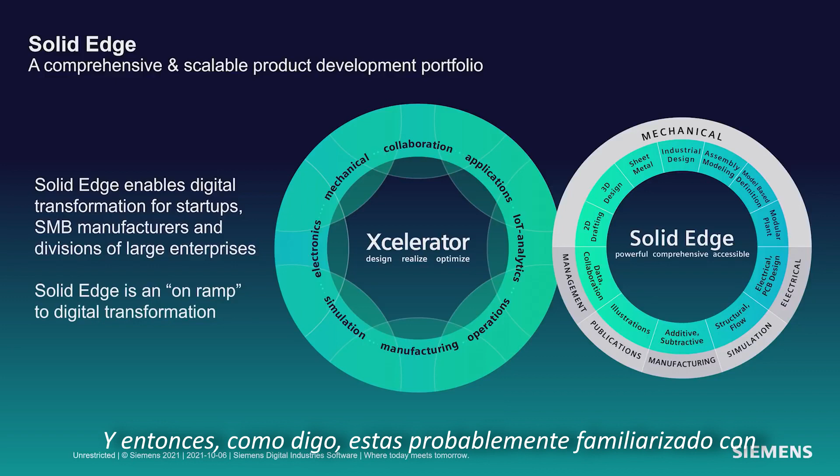And it all starts with Solid Edge. Solid Edge is your on-ramp, if you will, to digital transformation. You're probably familiar with lots of Solid Edge capabilities for sheet metal, 2D drafting, etc. But maybe you need to go beyond that with the whole Solid Edge portfolio and Xcelerator, whether that's managing that data, doing technical publications, simulation, electrical, it's all there for you.

And what we see is customers doing amazing things with Solid Edge and the Solid Edge portfolio. For example, eNovates. eNovates is a company in Belgium that makes mobile charging stations. And they're able to take Solid Edge and PADS Pro and use those two together to do great things. As you see, they don't find that level of integration in other engineering software.

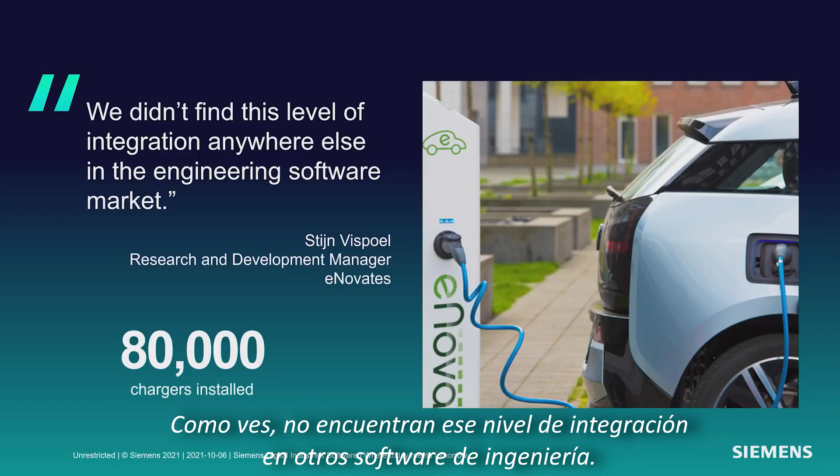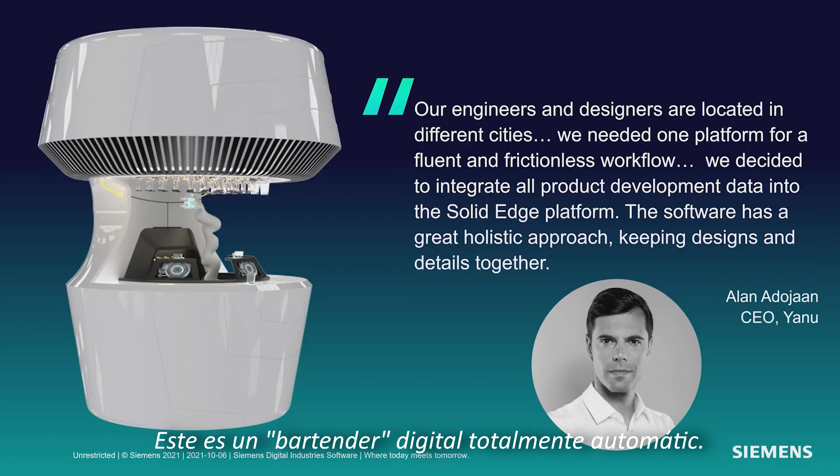Another great example is Yanu. They make the beautiful product you see on the left here. What product might that be? Probably something you've never seen before. This is a fully automatic digital bartender. So it can recognize you, make the proper drink, do the proper billing, all contactless, very important today. And I love what Alan has to say. The software has a great holistic design approach, and that's what we like to see and how we can bring you more productive software.

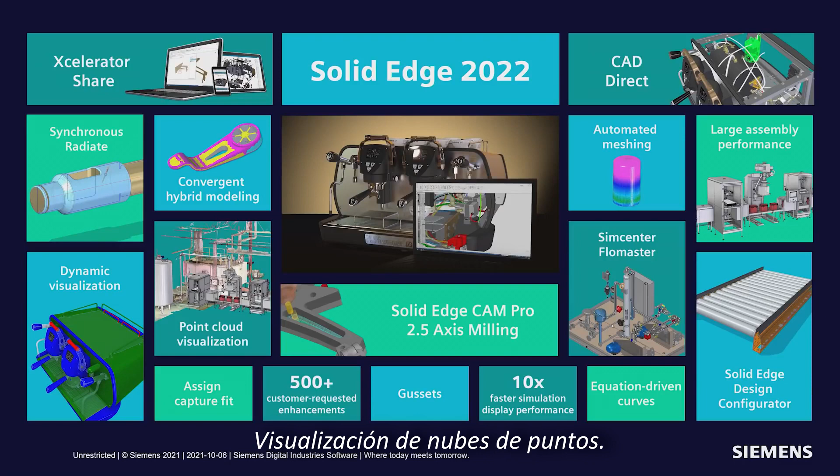So let's talk about Solid Edge 2022 itself. Solid Edge 2022. Engineered to grow your business. There's so much in it, we'll only be able to cover some of it today. Things like Xcelerator Share, allowing you to collaborate with customers and suppliers. Or CAD Direct, integrating CAD files from other systems and bringing them directly into Solid Edge seamlessly. Point cloud visualization, big scans of plants, being able to design your equipment in context of that big scan. Solid Edge Design Configurator, a whole new capability to configure your designs quickly and easily for your customers.

Now, as we go through our discussion today, we're going to be using two different data sets because there's just so much to see, such a broad range of functionality with Solid Edge. We'll be working with an espresso maker from Fiamma, a company based in Portugal. And we'll also work with a product from Bergner, a company based in Switzerland that makes chemical and pharmaceutical custom machinery.

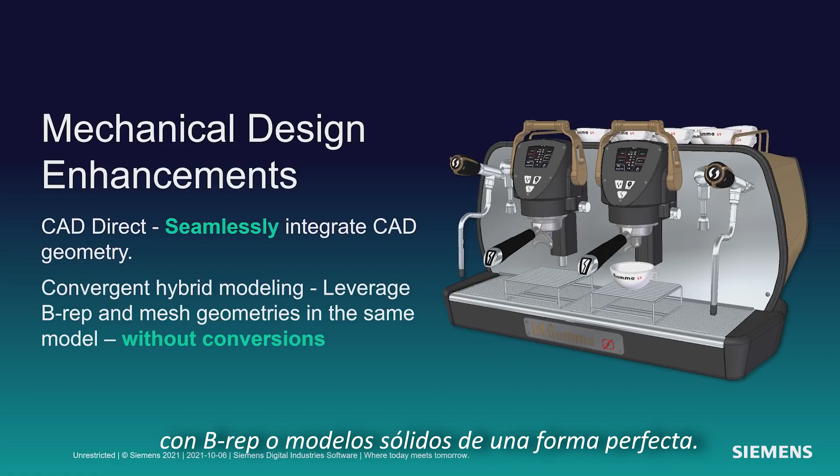So let's start by talking about mechanical design. And let's start with CAD Direct. CAD Direct lets you seamlessly integrate data from other systems into Solid Edge without translation and automatically take updates. We'll also talk about convergent modeling. We've been working on this technology for several years now. It's getting very sophisticated. The ability to integrate mesh models with B-rep or solid models in one seamless way. So let's look at that with Jeff now.

Thanks, Dan. First, we'll take a look at subdivision modeling. In this example, we will add support members to the base of the Fiamma espresso machine. The new subdivision bridge command can be used to easily connect edges or faces of subdivision cages and create a lofted structure between them. Here you see an example of that, where we'll select the faces of each subdivision model that we want to loft between.

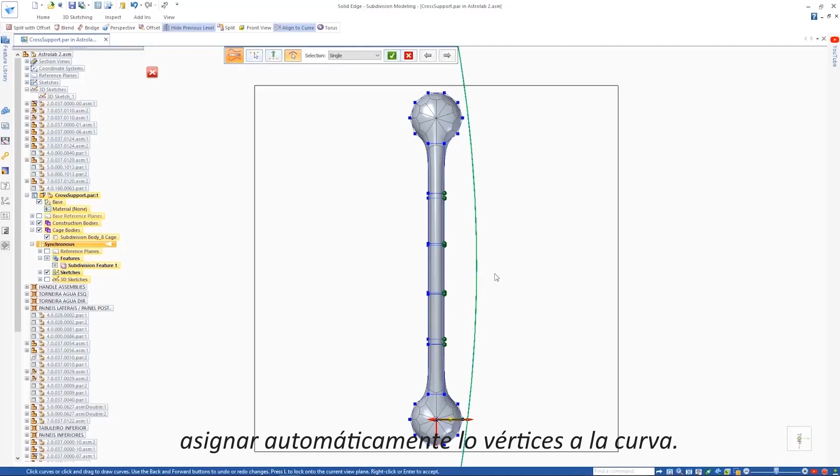Then we'll add the control curve to help us further define the overall shape. Next, we'll use the new Align to Curve command to further define the shape of the part, simply by selecting the cage vertices to define the direction and then picking the curve, which automatically maps those vertices to the curve. You can even sketch your own shapes and curves inside the context of the command, and gesturing is supported for inking your curves.

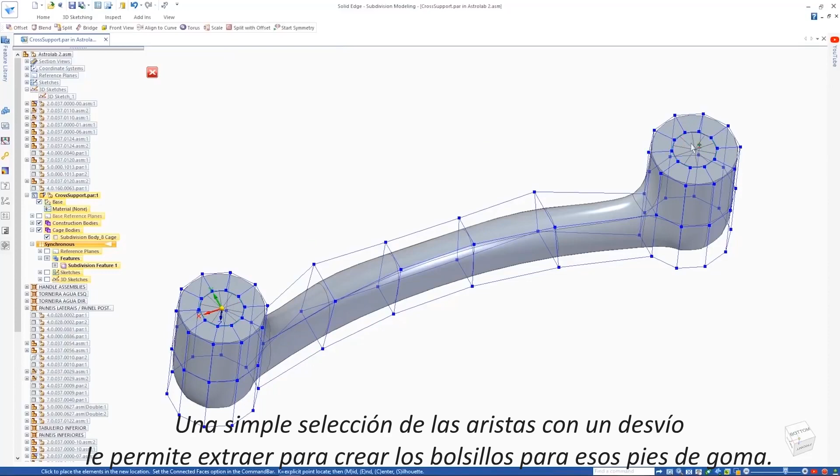Here we'll show another option called Split with Offset to add some pockets to support the rubber feet. A simple selection of the edges with an offset allows you to pull to create the pockets for those rubber feet. Next, we're going to replace the handle with a new design that's been 3D scanned.

This result is a mesh model that we import. We can visualize the mesh with the new Faceted Edge command. In this case, we'll clean up this model a little with the Remesh command.

Now faces have automatically been identified and the sketches are added to the planar faces of the mesh. We add a series of cutouts in order to reduce the weight and improve the appearance of the part. Notice the resulting geometry isn't faceted.

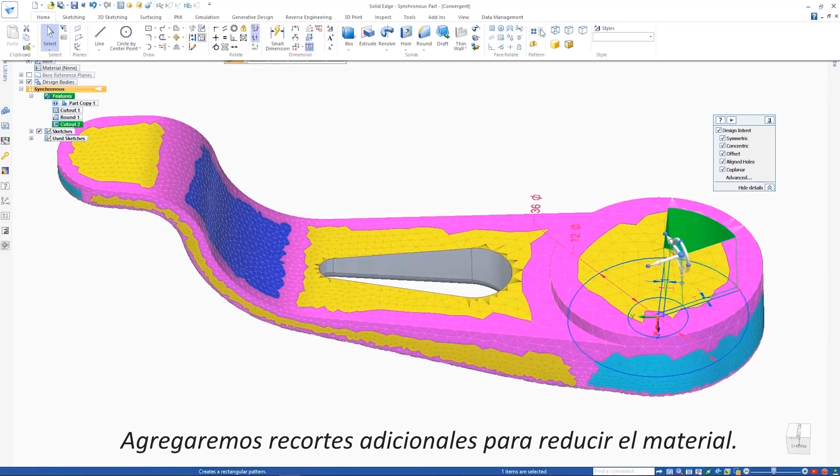Solid Edge now seamlessly combines mesh and B-rep geometry in the same body or part. We'll add additional cutouts to reduce the material. Once the cutout is complete, it can be patterned.

Finally, we're back in the assembly where we'll replace the current handle with the new meshed handle. But you'll notice the mounting holes are missing from the component. This can easily be solved by doing a Boolean operation using the mesh model as the target and the components from the assembly as the cutting geometry. These new capabilities further enhance your ability to use mesh models in your design process.

Now we'll use the new component finder in the Solid Edge Pathfinder and we'll search for the desired filter holder handle, which is designed as a family of assemblies. One of the versions is designed for a double espresso shot, the other is a single espresso shot.

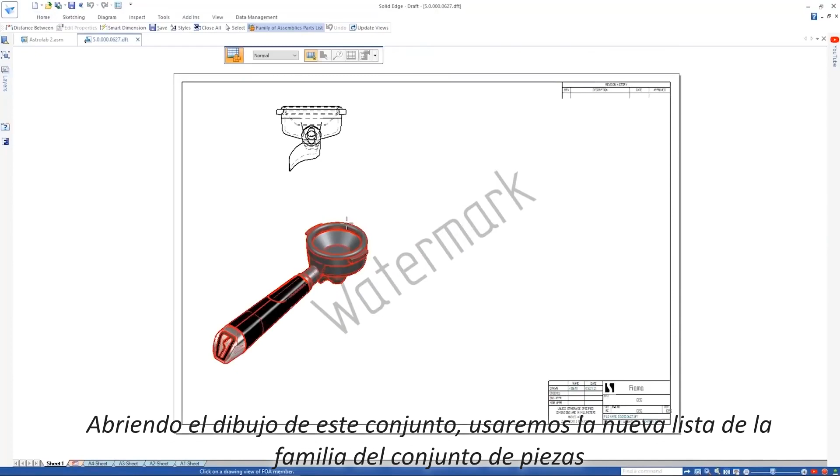Opening the drawing of this assembly, we'll use the new family of assemblies parts list to place a table and detail the parts used for each member.

Now we'll look at some enhancements to dimensioning in Draft. Dimensioning to virtual intersections or arcs of rounded edges is now supported. We can also choose to display projection lines to those intersection points.

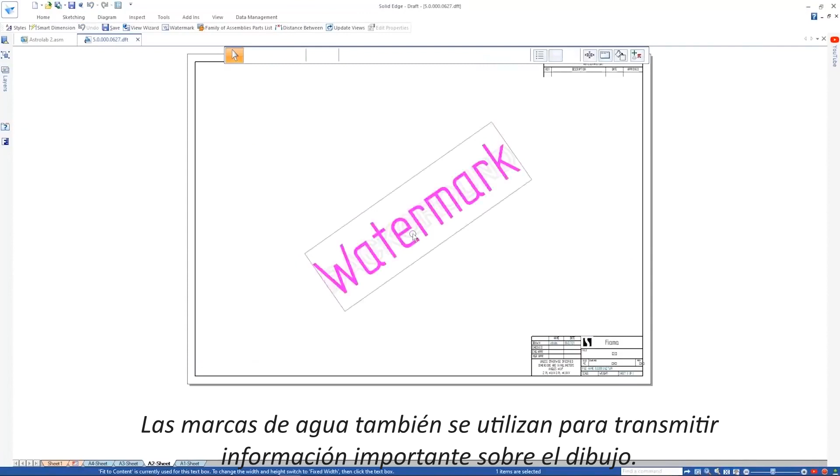Watermarks are also used to convey important information on the drawing. We'll change the existing one so that it retrieves the document status for the drawing property text.

The new CAD Direct command enables us to use foreign CAD data, geometry, and assemblies in Solid Edge directly without requiring any translation. The water boilers that you're looking at here were designed in NX.

Once inserted into Solid Edge, they can be positioned just like any other assembly. Since we need two of these, we'll simply copy one to create the second. Notice the boilers aren't quite in the right location. We'll go back into NX and make the changes needed to the mounting bracket so they'll be in the right position. Since Solid Edge has associative links with NX, a simple update brings the changes in.

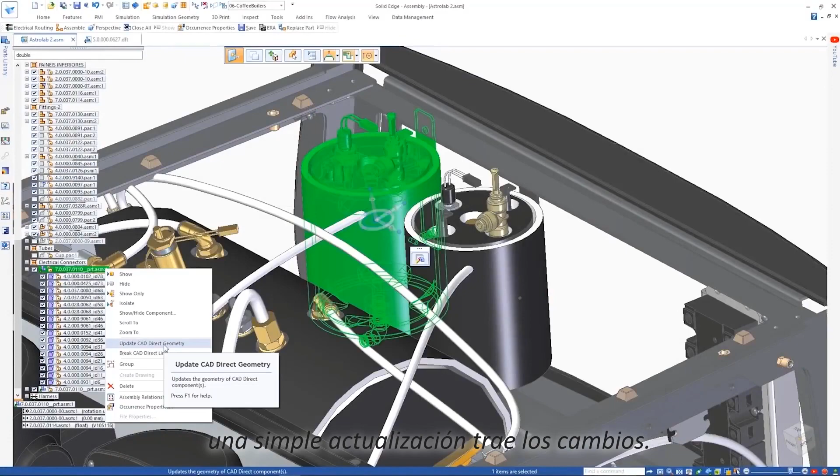Next, we'll look at electrical routing enhancements. Solid Edge now supports the display of bicolored wires, allowing us to change the display of this ground wire to be striped green and yellow. Various pattern types are supported as well, including single stripes, helical stripes, zebra stripes, and dashes.

And finally, KeyShot, the best-in-class rendering solution, also sees some impressive updates. Decals defined in Solid Edge may be automatically transferred, saving time and effort, which can be seen here on the logos and the cups in the digital scene.

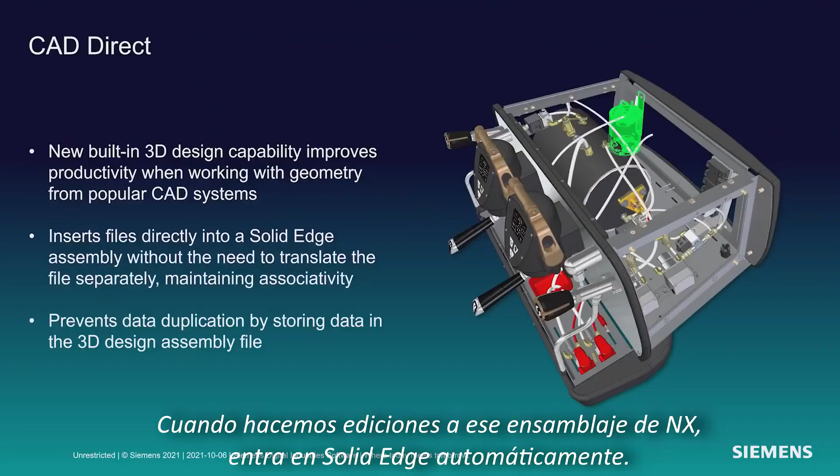Lots of amazing stuff in there, but I'm only going to highlight a couple things here that I think are real game changers. CAD Direct: you have the capability to get an NX assembly into Solid Edge directly, no translation. And when you make edits to that NX assembly, it comes into Solid Edge automatically. There's no extra files to manage. You don't have to worry about that. It's all CAD Direct.

And what about convergent hybrid modeling? You saw taking triangle meshes and B-rep solid models, pulling that all together into a single cohesive model, significantly reducing your design time.

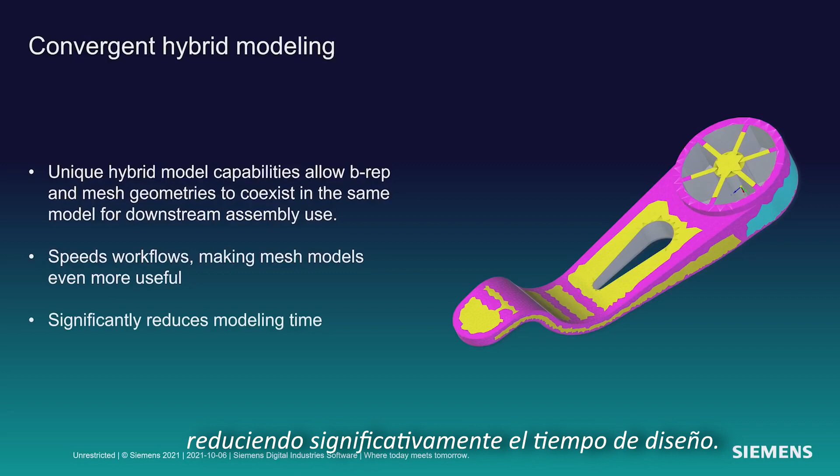Let's talk about some other mechanical design enhancements, some other great things in here.

Point clouds. It's becoming fairly common to be able to scan an entire plant or factory and bring that data forward. We can now bring that data into Solid Edge so that you can design in the context of that factory or plant. What about large assembly modeling?

We see people first building parts, then assemblies, then whole factory lines. Assembly modeling in Solid Edge keeps getting faster and faster, best in the business. And Synchronous Radiate, an amazing new command within the synchronous modeling environment that allows you to deal with radially symmetric parts and edit those effortlessly. So let's take a look at that now, Jeff.

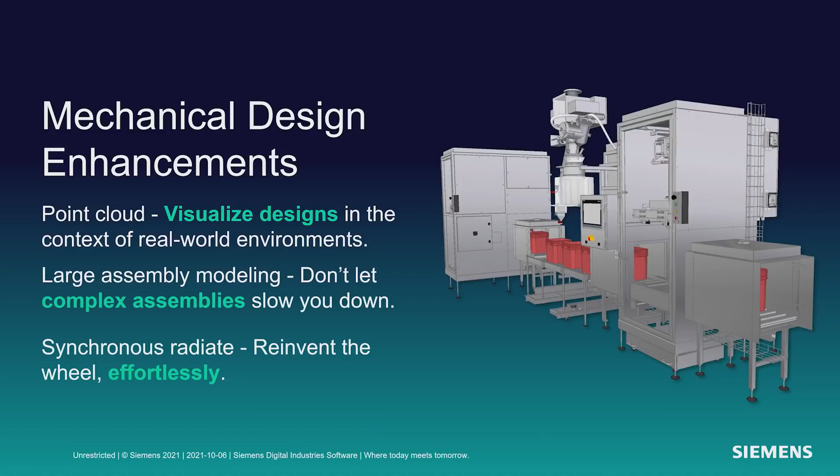Thanks, Dan. Well, the first thing we'll do is take a look at a new assembly preview mode. This mode allows you to very quickly open Solid Edge components and very large Solid Edge assemblies lightning fast. In preview mode, you can manipulate the view, show and hide components, and apply display configurations.

In this case, we'll isolate the most critical part of the model that we want to edit using a configuration. Then we'll simply tell the system how we want to open, and open only the components that are to be edited, saving you time and memory.

Another time-saving enhancement is the gusset command. We now allow you to automatically add gussets to a frame structure. Here you can see the user interface. You can define these gussets in any shape and size that you desire. Then you simply select the frame element, position where the gusset is to go, and the system automatically creates the component there.

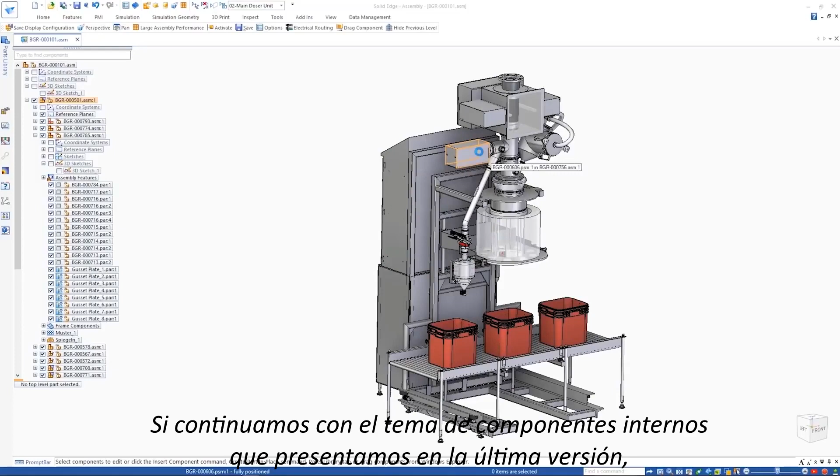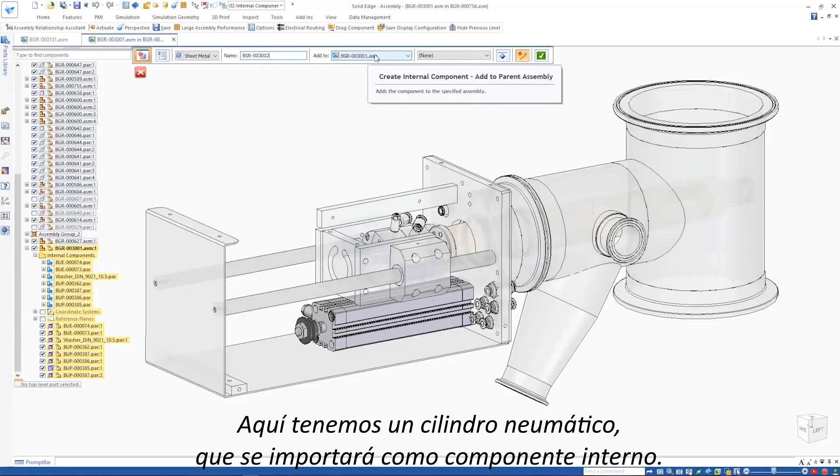If we continue down the internal components theme introduced in the last release, we now allow you to create an internal component and actually create the model geometry directly inside the Solid Edge assembly. We've introduced this new assembly modeling capability that gives you the ability to create the entirety of a design without any need for an external file. Here we have a pneumatic cylinder which will be imported as an internal component. We need to add a bracket to this assembly, but since it's a purchased part, we'll just create this as an internal component, again saving the need for external tracking of files.

If you'll notice during sketching, a pop-up menu allows you to quickly access commands that are relevant to your selection. This is new for Solid Edge 2022.

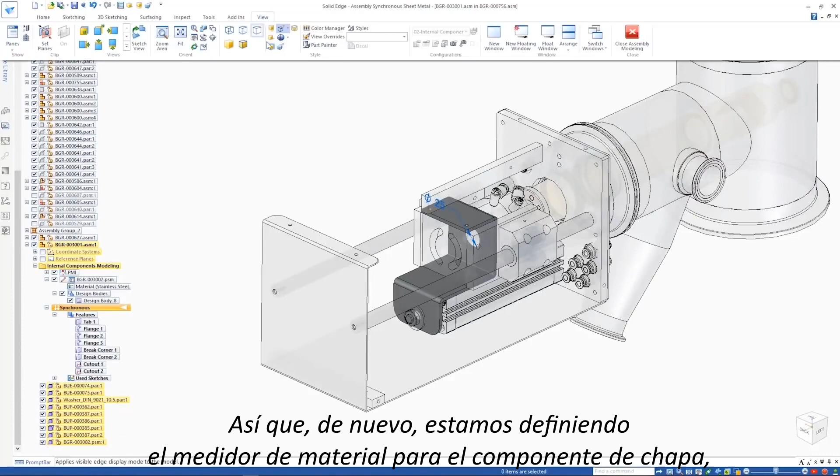So we've defined our sheet metal part. We'll also have to give it a material definition and a gauge definition. In addition, we're able to create geometry and reference the components from the assembly, whether they're internal components or real components in the assembly. Again, we're defining the material gauge for the sheet metal component, and we've defined this component completely inside the context of this assembly.

You're also able to drag the component, doing animations using both internal components as well as the real component combined.

The new component finder speeds up the process for locating parts within the assembly. You simply key in the name and it finds the list quickly. Here we found a shaft, and we used the new Radiate command to edit the radius or the diameter of the shaft component.

You simply select the shaft, putting the components in the select set that you wish to change, and then Synchronous does the rest. In this particular example, we want to include the pocket in the radiate and the offset option. Simply selecting that pocket and including it allows that to be done.

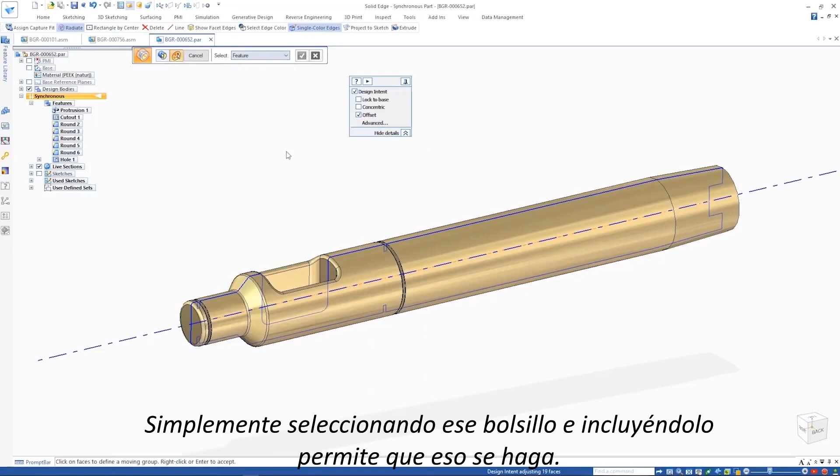A new Assign Capture Fit command allows relationships to be predefined on a component while in the context of the part. Here you can see that Capture Fit relationships already exist. We'll add a new Capture Fit to the collection and save it to the component. When I place the handle into the assembly, all you have to do is select the component and select the mating components you want to mate it to, and the handle automatically snaps into place. It's as easy as that.

Here's another example where we have a handle that needs to snap to 5 new locations. Again, the Assign Capture Fit makes it easy.

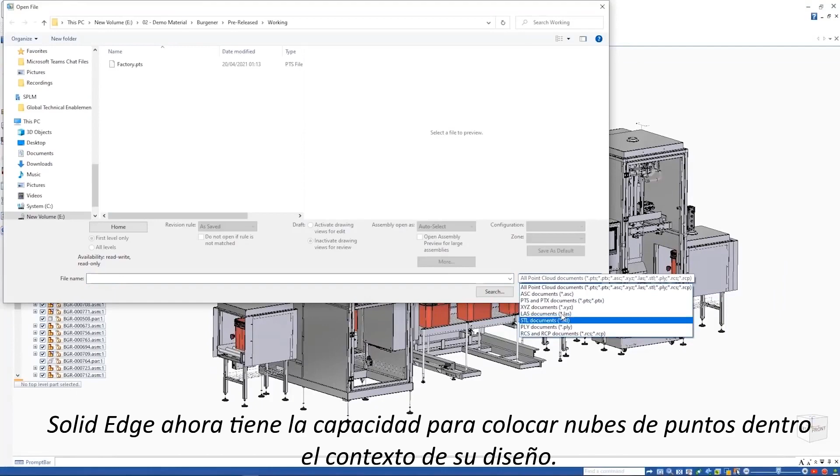Solid Edge now has the ability to place point clouds within the context of your design. This allows you to reference and visually indicate where your components will be placed inside a large assembly. Solid Edge supports multiple point cloud types and then allows you to position your component inside the context of the plant design.

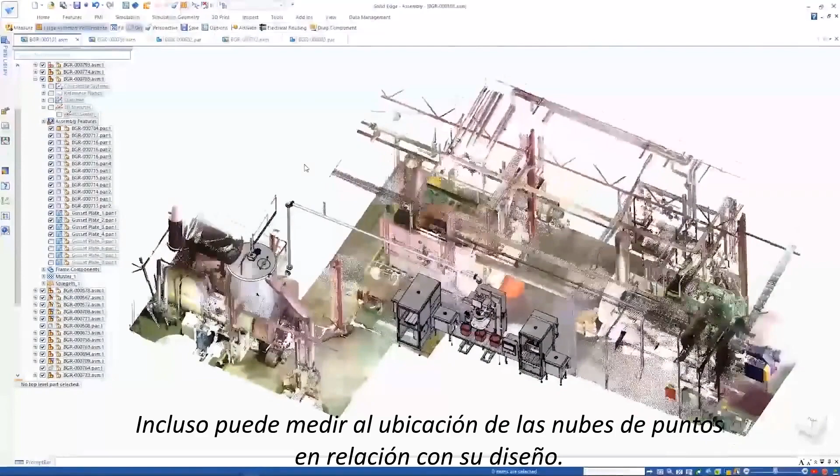The point cloud can be easily repositioned. Clipping planes can be used. You can even measure to the location of the point clouds relative to your design. Here you see that the tank component was in the wrong position, and it was moved to match the point cloud and the plant definition more precisely. And that's it, Dan. Back over to you.

All right, thanks Jeff. So many great things to see in there. But something I really want to highlight to you is a game changer: point cloud visualization. The ability to take scans in, gigantic scans, millions or billions of points, and be able to look at those in the context of Solid Edge and integrate your design directly in there, designing in context of that point cloud.

As you can see, they're full color, they give the full feel of the plant or factory. Really amazing stuff.

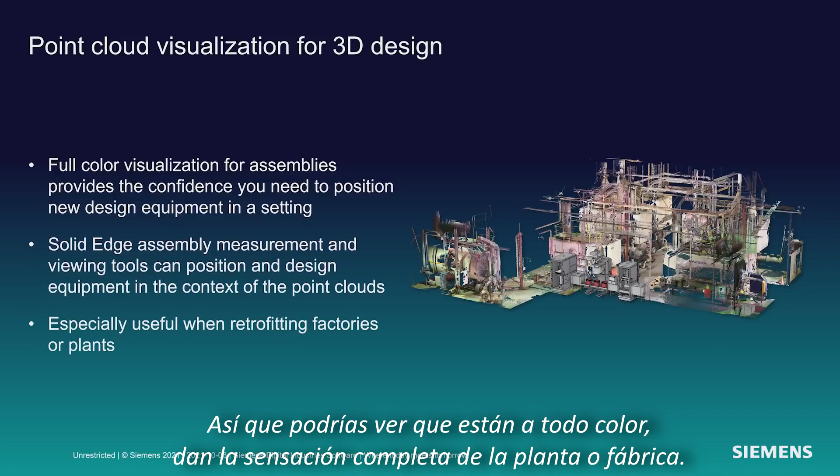And we see that our customers really love this new technology. So Benjamin at Bergner, for example, eliminated a lot of tedious manual effort. It's just so much easier with the new point cloud technology.

And what about large assembly modeling itself? Order of magnitude increase in large assembly modeling performance. So you have that preview mode where you can very quickly bring up the assembly, very massive assemblies, decide what you want to work on, and then just bring in that bit of the assembly, really improving your productivity.

And we see that folks are already taking advantage of this. Our beta customers have been using this, like Luca Carminati at CMS. Much, much faster work, saving a lot of work on their designs.

And what about synchronous radiate? Really amazing stuff if you're working on those axisymmetric parts. Being able to make edits without having to do any extra effort happens almost magically. Great stuff.

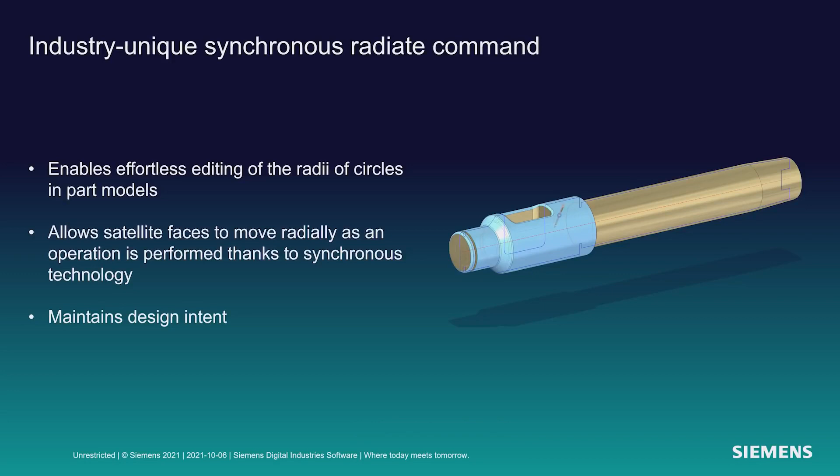Okay, next up is Solid Edge Design Configurator. I'm very excited about this. If you're doing any engineer, configure-to-order type of products, the ability to very quickly change your designs and have new quotes very quickly. Let's take a look at it with Jeff.

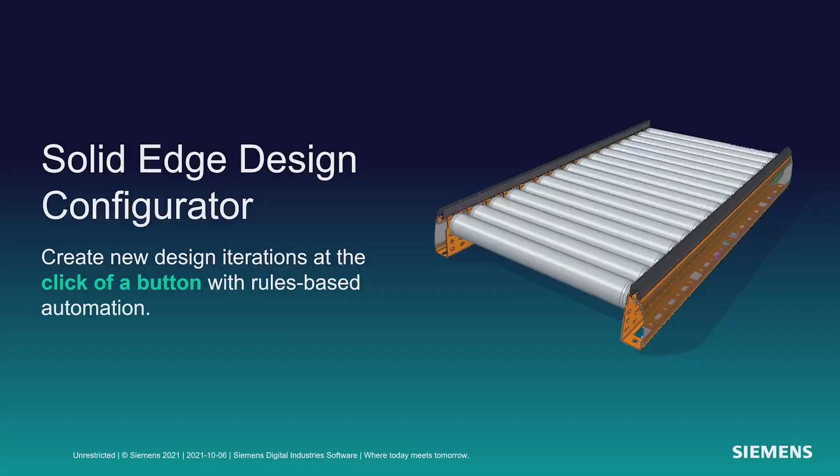Thanks, Dan. The new Solid Edge Design Configurator allows you to design multiple product variants directly in the context of Solid Edge. In this example, we'll configure a variety of conveyor designs.

The first step is to select the component to be configured. The next step is to define the master input parameters of the configuration. In this case, it's the length and width of the conveyor plus the pitch of the rollers. Values can be easily edited for any parameter, and images can be included in order to help the end user identify the needed inputs when configuring the model.

Defining a new input parameter for the pitch of the conveyor, we will quickly configure the name, type, label, and render style to use radio buttons. The pitch value of the conveyor can be customized between 60 and 90.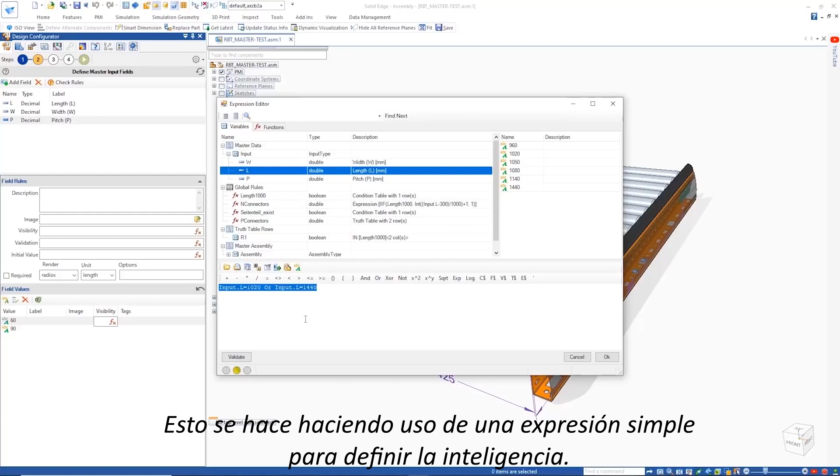However, since different lengths of the conveyor require different pitches, visibility rules need to be applied. This is done by making use of a simple expression to define the intelligence. Here, the rules are being validated to ensure consistency and proper definition have been made. The function is then copied and pasted to allow you to easily reuse formulas without having to include them again. Skipping to the last step of the configuration, we can see the configuration form is properly created.

Next, defining the rules for the process. Here we have multiple rules to drive and configure the connectors at the bottom of the conveyor. We will use a combination of simple condition and expression rules and a truth table to work out the number of positions of the connector. All rules can be quickly validated.

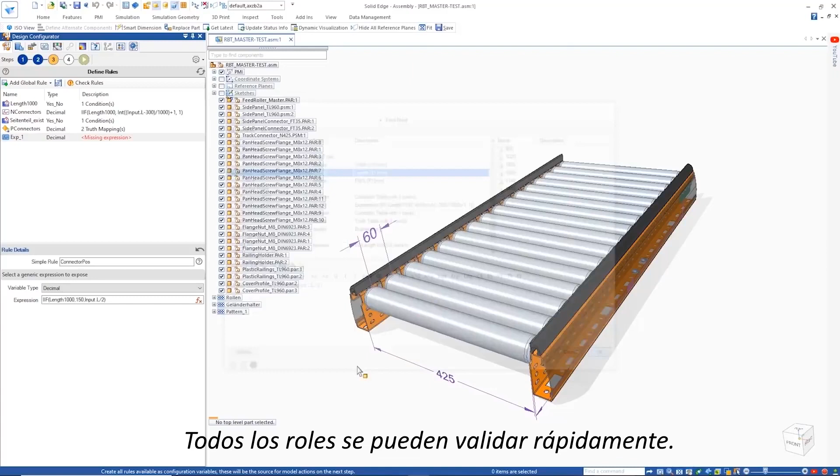Finally, we specify the actions to be taken. Here, variables are set and components are replaced to satisfy the input parameters. A rename model action will ensure our final assembly will be renamed appropriately and also create the other necessary outputs, for example a step file as shown here. Now we can run it quickly and create as many configurations as needed.

A newly generated configuration can easily be shared with Pack and Go. The configuration logic is all stored within the CAD model. There's no need for any further plugins or external resources.

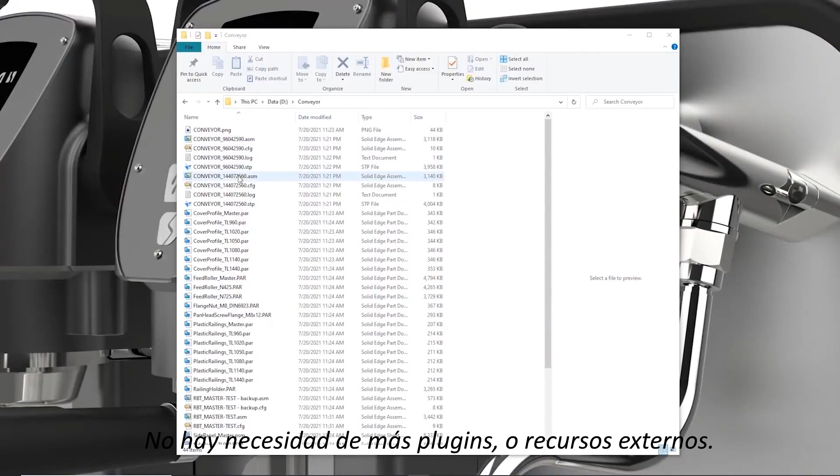And with that, Dan, I'll hand it back to you. All right, thanks, Jeff.

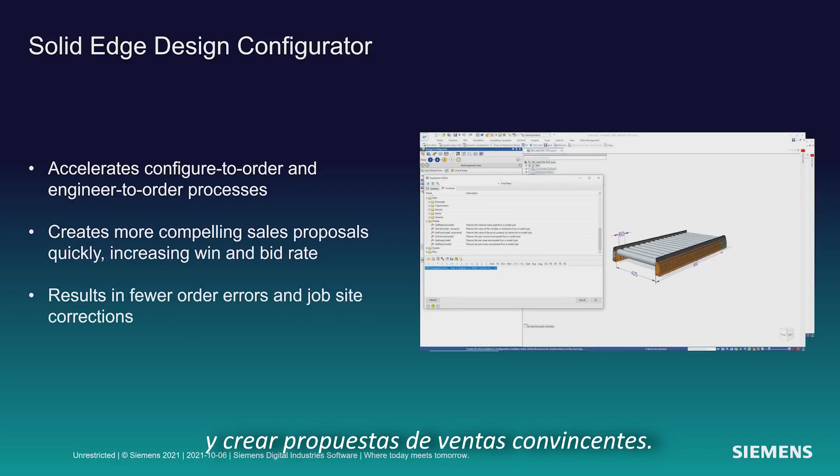So as you see, with the Solid Edge Design Configurator, you can accelerate your configure to order and engineer to order processes and create compelling sales proposals. You're also going to see that it really error checks for you and it creates a nice dialogue for your users to interact with so you can very quickly configure new products.

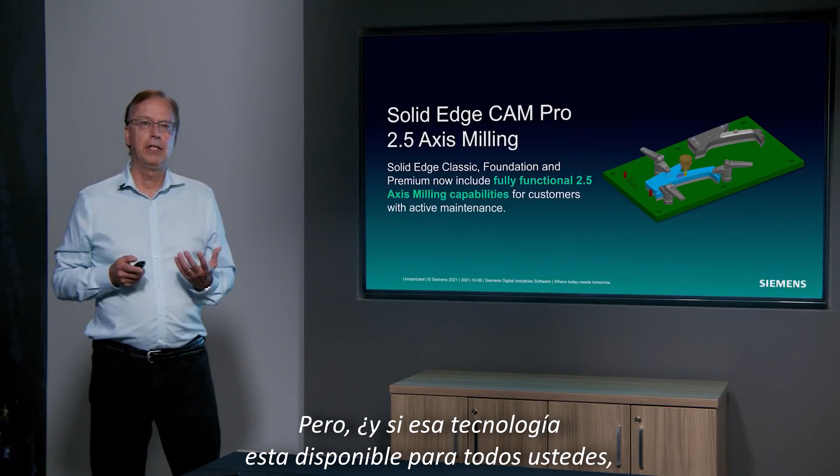What about CAM? Solid Edge CAM Pro. Tried and true technology developed over the last 40 years. A lot of users using it today and enjoy the benefits of it. But what if that technology was available to all of you, all Solid Edge customers on maintenance? That's what we want to introduce to you today with Solid Edge 2022. Jeff. Thanks, Dan.

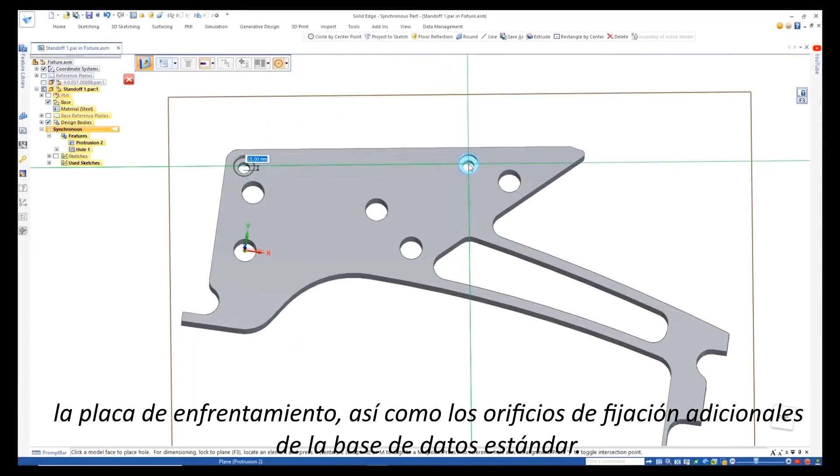Here we'll be using Solid Edge CAM Pro to create the manufacturing toolpaths for the rear legs of the Fiamma espresso machine. First, we'll use the Solid Edge assembly tools to create the shape to represent the stock parts, and also the parts that form the fixture assembly, which includes the standoff plate as well as additional fixing holes from the standard database. We will also make use of supplier catalog in 3DFindIT to get the appropriate socket head cap screws to be used to fix the component in the fixture.

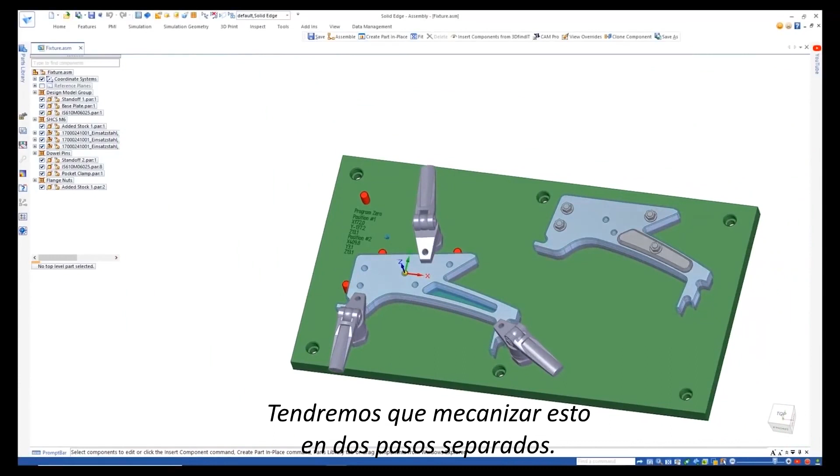So as you can see, Solid Edge is a great CAD for CAM tool. We'll need to machine this in two separate steps. Step 1 is to mill the pocket and drill the holes, and step 2 is to machine the profile. One click will send the entire assembly to the Solid Edge CAM Pro application. Note that associativity is maintained to the complete assembly, so if there are any last-minute changes, we can quickly update them and continue the NC programming process.

New for Solid Edge CAM Pro is the ability to create adaptive roughing toolpaths for 2.5-axis operations. This is included at no additional cost. These are faster than traditional toolpaths and extend the cutting life of your tools. Notice the advanced graphic capabilities for validating your toolpath.

Here we'll create spot drilling operations for the 5 holes in the support. Notice the graphical pop-up hints that help us with operation selection. Graphical helps are also available for geometric selection. Each time we select a hole, we get a preview of the machining that will take place. Again, at any point in the process, we can get visual feedback on our decisions.

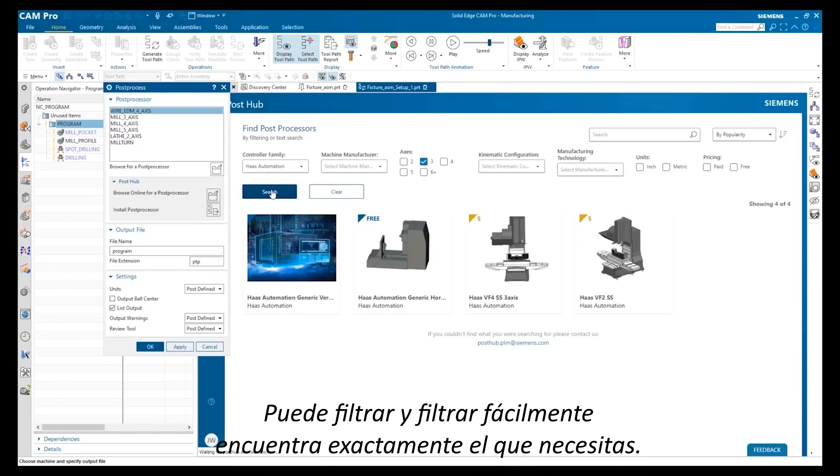Now that our CNC program is complete, let's run through the whole visualization process. Notice you get to completely visualize the entire machining process before committing it to machining. Of course, no job is finished until it has been post-processed for a specific machine. That's where PostHub comes in. It's an online database of over 1,200 post-processors. You can easily filter and find exactly the one you need. Also, PostHub is constantly updated, bringing you the most recent tools.

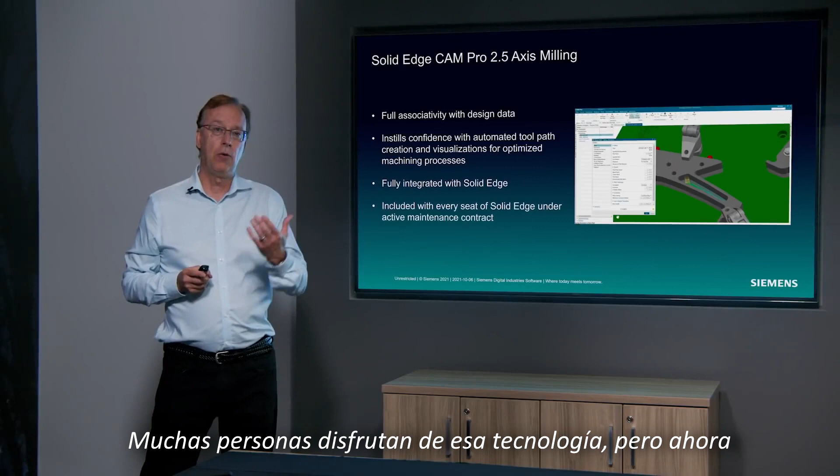And Dan, with that, I'll turn it back over to you. All right, thanks, Jeff. I'm really excited about this. There's a great heritage in Solid Edge CAM Pro and our machining technology over the last 40 years. Many people enjoy that technology, but now every Solid Edge user who's on maintenance can enjoy that technology and work with Solid Edge CAM Pro.

Next up is Xcelerator Share. I'm super excited about this. It's a functionality in Solid Edge that allows you to collaborate with colleagues, suppliers, customers very easily. Nothing for you to set up, works on all sorts of devices. So let's take a look at that.

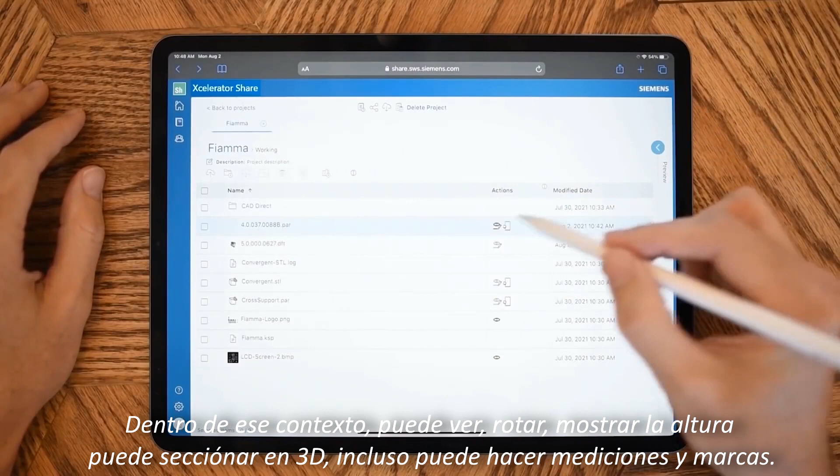Jeff. Thanks, Dan. Xcelerator Share allows you to import your CAD models into a secure cloud location. Within that context, you can view, you can rotate, you can show height, you can 3D section, you can even do measurements and markups. Here, a reviewer has identified the need for some change in the design. The location of the change is identified by a sticky note and a place describing the needed change.

Xcelerator Share offers maximum traceability, as all markups are recorded, enabling conversations back and forth on any of the issues you're tracking. It also records who made the markups and when it was made. We can also easily go back to the markups at any time. Simply save your markups and send them to the designer for review.

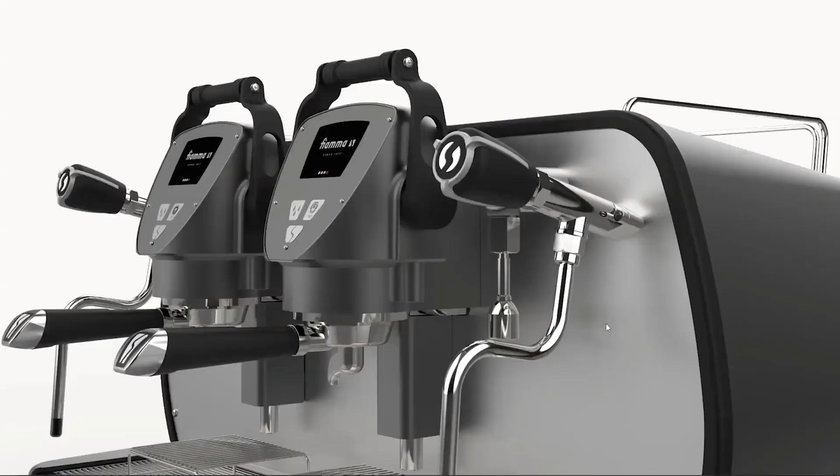With Share, you can also directly connect to Solid Edge, synchronizing your data from your desktop to the cloud. Here we have the same project on our desktop. It's represented simply as a folder. Any data that we have in this folder will get synchronized in the background.

In Solid Edge, we can securely sign into Xcelerator Share and see those same cloud-based projects. The espresso machine can be opened and we can go right to work on the part in question. The designer can easily access that same markup in the cloud directly from within Solid Edge.

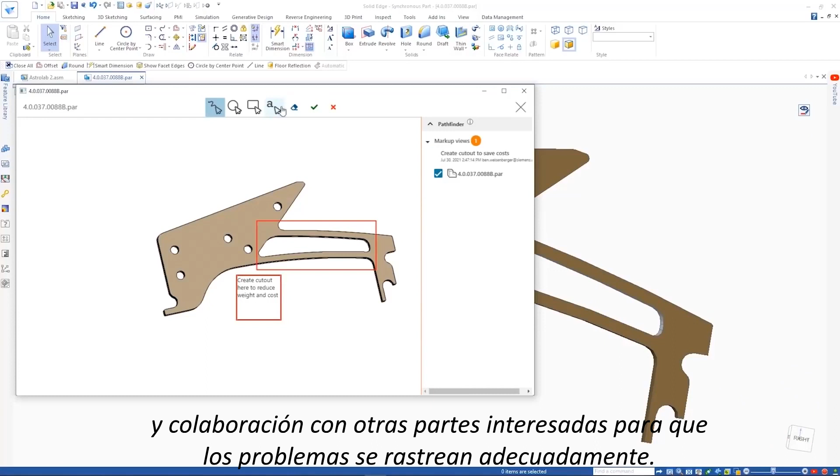Once completing the change, another markup continues that two-way conversation and collaboration with other stakeholders so that the issues are tracked appropriately. Another great feature of Xcelerator Share is the ability to share a project with anyone. Simply enter the email address of the person with whom you'd like to share and choose their access permission level. Here we can choose view and download, or edit and download, depending on how you want to protect your intellectual property. We'll share this design with one of your colleagues and our customers and give them the appropriate access.

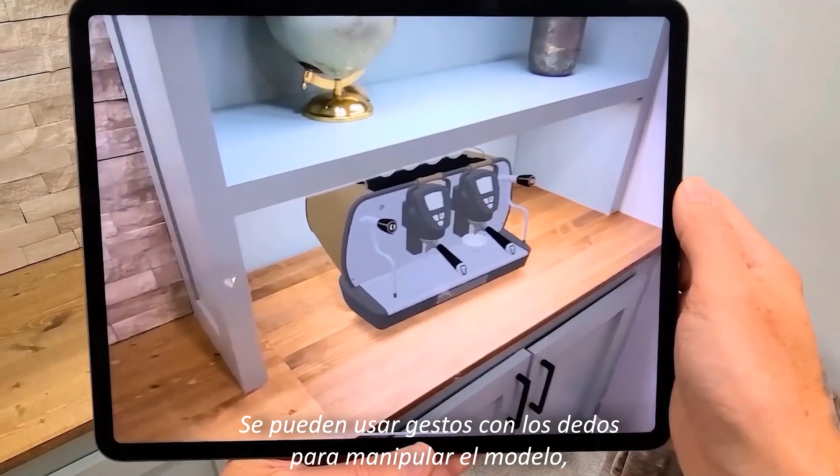Finally, with the Share augmented reality feature, you can see exactly how your designs will look in the real-world environment. Snap the design onto any surface seen in the camera lens at the correct scale. The finger gestures can be used to manipulate the model and easily visualize what your design looks like in a real environment. So back over to you, Dan.

Thanks, Jeff. All right, Xcelerator Share. Really great stuff. Next generation cloud-based collaboration that allows you to work inside your company with colleagues or work with suppliers, work with customers. Nothing for you to set up. Works on every device. So whether you have a Mac or an iPad or a Chromebook, it works on all those devices with no special setup. And you saw the ability to write notes that are automatically converted to text, share those markups. Very exciting stuff.

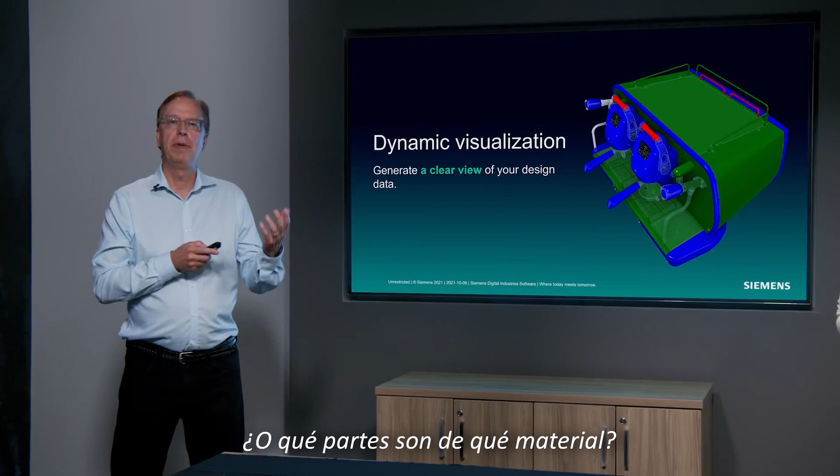Next up's dynamic visualization. You make complicated products, large assemblies. How do you know which parts are from which supplier? Or which parts are of what material? Dynamic visualization will help you with that problem. Let's take a look at that now with Jeff.

Thanks, Dan. Dynamic visualization gives you the great capabilities to generate visual reports of your assembly. So what we'll do here is we'll open a Solid Edge assembly using Teamcenter Active Workspace. We'll create a visual report based on the component supplier and the material definition. So the first thing you'll do is you'll add columns to the user interface, those columns that you want to filter on. Here we've added suppliers and material. So for each of those, we'll filter on the particular material and the particular supplier that we're interested in visualizing.

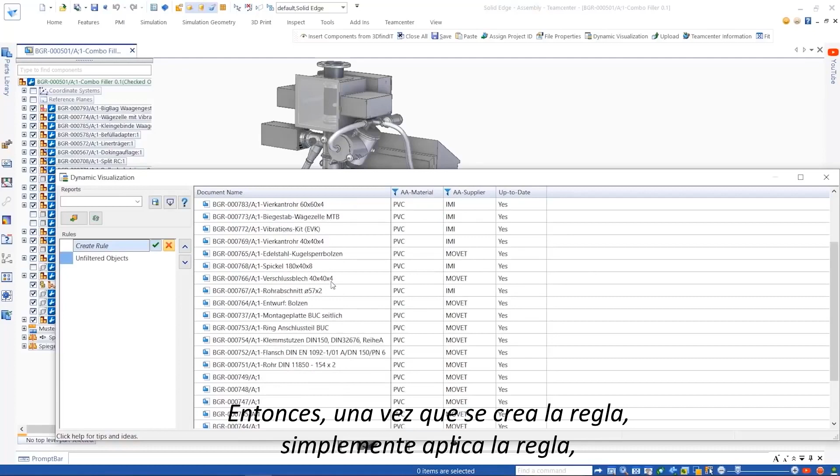So once the rule is created, you simply apply the rule, and the model changes display to show you the rule definition. And here you can see in red the components based on that supplier and that material selected. You can also export these rules and import them into various assemblies. Here we have a rule that allows us to identify which user created which components. We'll modify that rule to allow us to identify work in progress as well as components that are created by Pat.

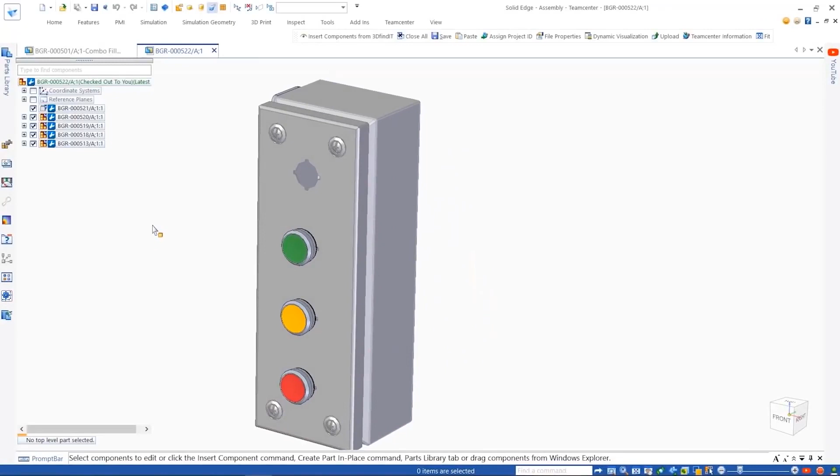We can highlight those, select those, and then go into edit mode. Here we'll see we need to add a warning light to this box. We use 3DfindIT to find the particular light from the particular supplier that we want. Once we've identified the right one, we'll generate the component in Solid Edge. But in this case, the component already is contained in the Teamcenter database. So instead of replicating that in the database, we'll simply reuse what's already there.

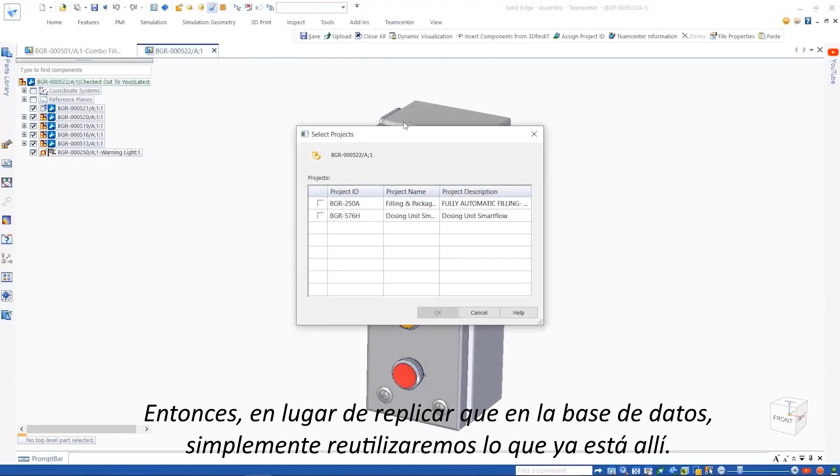Also in Solid Edge 2022, we were able to take advantage of the project definitions within Teamcenter. Here we can see we've assigned the components to a particular project in Teamcenter. The Solid Edge built-in data management also supports dynamic visualization. Here again, we'll display the assembly coloring based on the material type to ensure that we have the proper materials throughout the model.

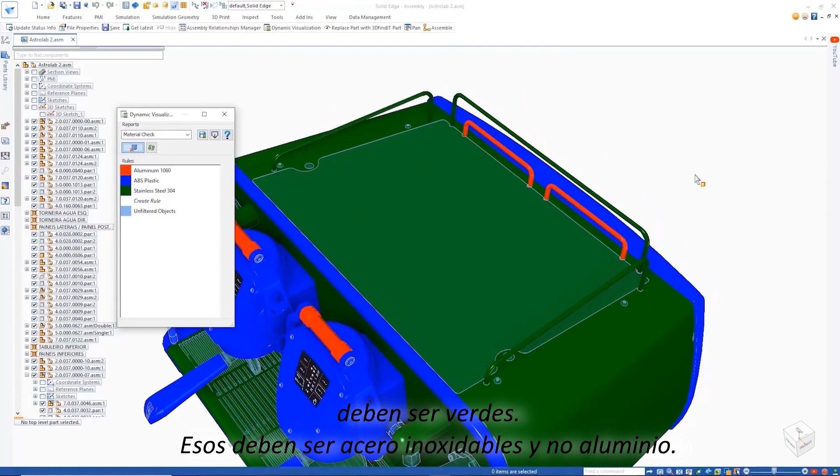So again, the rule is applied, visually it's displayed, and you'll notice that the red handles should be green. Those should be stainless steel and not aluminum. So we'll send those back to the designer to be reworked and the proper material to be applied. So once applied, we can then do an auto update of the status, and the system will automatically show us the status and then update to get the latest component. In this case, the handles are updated with the proper material. We will rerun the same rule, and you'll see that now the handles are green and therefore in the correct material.

Another nice enhancement is that we've modernized the file properties dialog. And you can see here it looks much more user-friendly and lets you easily create new custom properties as shown here.

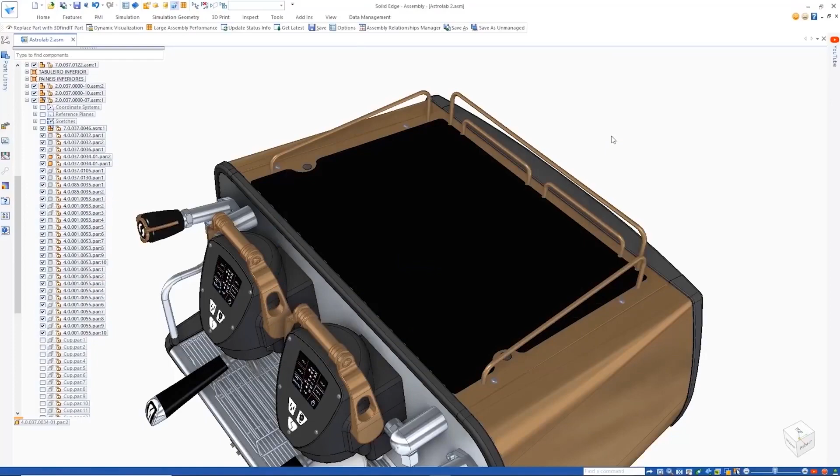This next example will use replace part with 3DfindIT. 3DfindIT has the ability to take a component and use that component geometry to search the catalog database for similar components. Here, once the component is found, we identify the supplier that we desire, and with a few simple clicks, that component is inserted into the assembly, replacing the previous geometry.

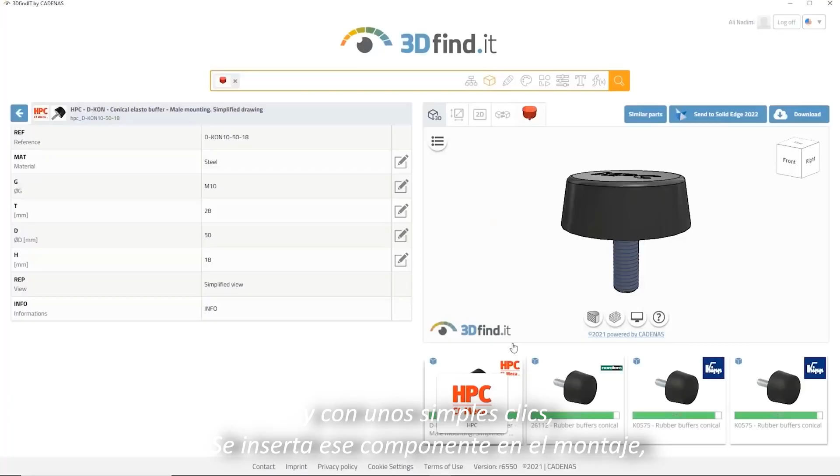And lastly, we've added Pack and Go directly to the Windows Explorer UI, making it easy for you to share your data without having to open the assembly within Solid Edge. That's it, Dan. Back to you. All right. Thanks so much, Jeff.

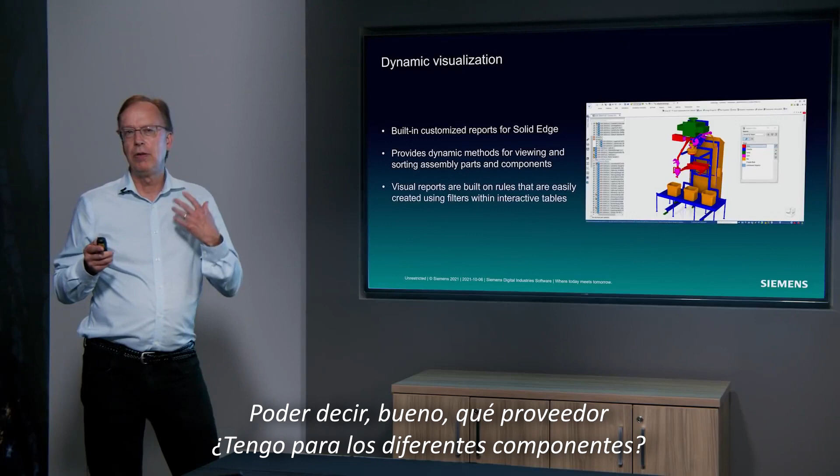So many good things you saw in there with 3D Find It and the ability to replace components, search directly using geometric shapes, and so on. But I want to highlight to you this dynamic visualization. Being able to say, well, what supplier do I have for the different components? Color code for me all the things that are stainless steel. Color code for me all the parts that are in work. Amazing technology that would save you a lot of time and money.

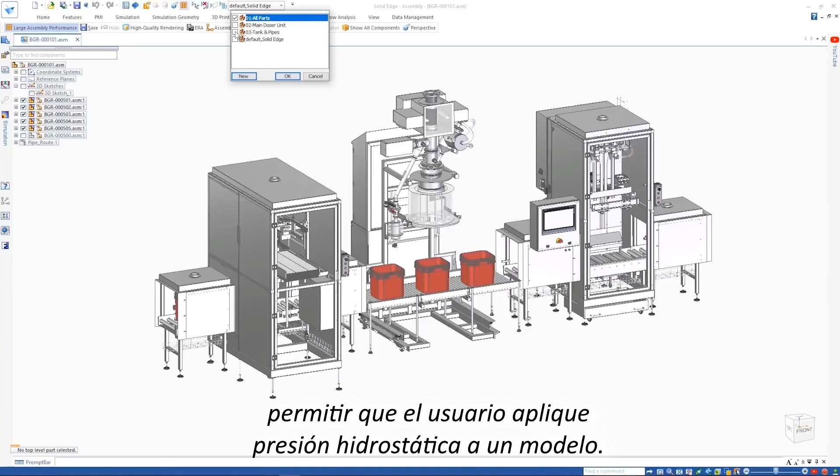Next up is Solid Edge simulation. We have some great enhancements in there, some game-changing enhancements in terms of the ability to remesh parts using the body mesh command, and some other great tools. Let's take a look at those, Jeff. Thanks, Dan. We'll start by looking at a new boundary condition allowing the user to apply hydrostatic pressure to a model.

So we'll apply a configuration that gives us the geometry of interest. Here we want to look at this tank on the left and do an analysis, assuming that tank is filled with liquid. So we'll create a hydrostatic study, and in the definition of the loads, we'll use the new hydrostatic pressure command. All you have to do is to identify the surface to apply the load, identify the depth of the liquid in the tank in this case, and then provide the density of the liquid within the tank. And Solid Edge will do the rest.

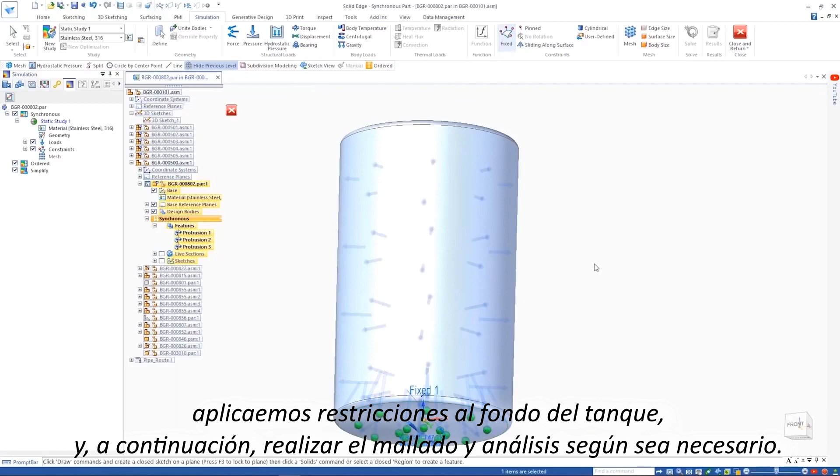To finish the analysis model, we'll apply constraints to the bottom of the tank and then perform the meshing and analysis as needed. Notice on the new mesh dialog a body mesh. This is proprietary technology from Siemens that does a really good job meshing complex models. Some things that couldn't be meshed before can now easily be meshed much quicker and much more reliably than in the past.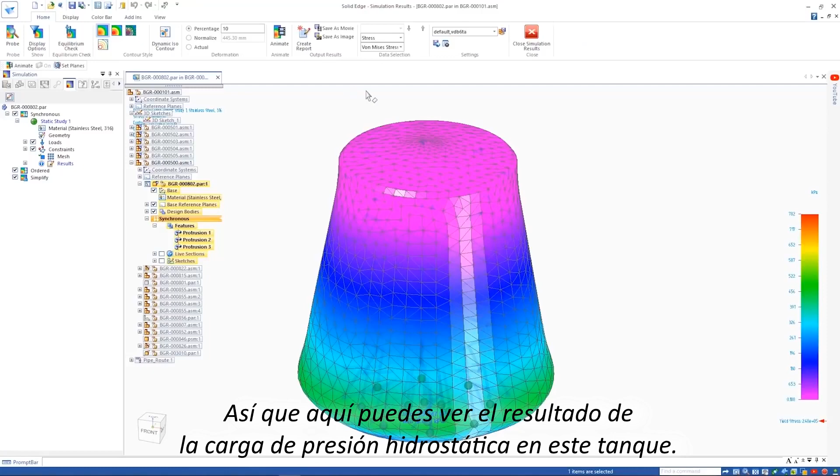So here you see the result of the hydrostatic pressure load in this tank. We'll change the liquid level in the tank and run the analysis again just to validate that this tank will withstand the pressure exerted on it in production. There you see the animation of the stresses, and they show up in the obvious place at the bottom of the tank where you might expect.

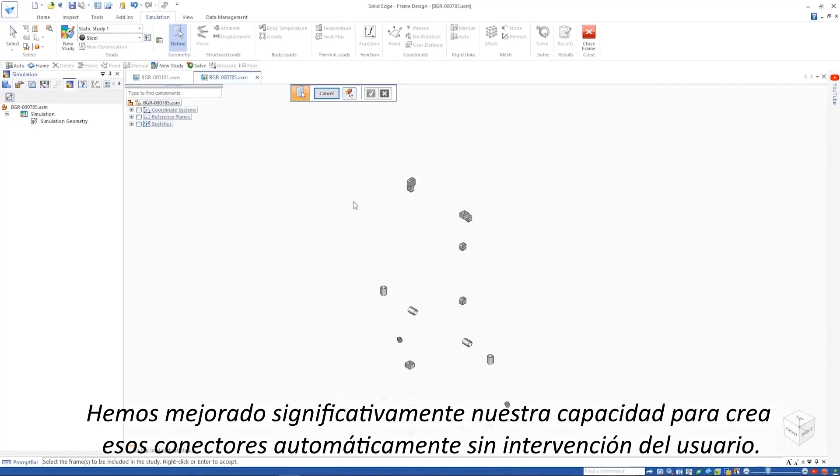Another great enhancement we have in simulation for Solid Edge 2022 is improvements to beam meshing. Here we're taking a frame structure and creating beam elements for the finite element analysis. Notice that the rigid connectors were automatically placed. We've improved significantly our ability to create those connectors automatically without any user intervention. Here the user has selected the bottom and changed some of the parameters to get the rigid connections correct. The bottom of the frame is then fixed, loads are applied, and the analysis is run.

Once complete, you'll see some enhancements to the output, to the post-processing for this model. We now can post-process and display contours using von Mises stress, and we've also improved factor of safety stress contours based on those same von Mises stresses.

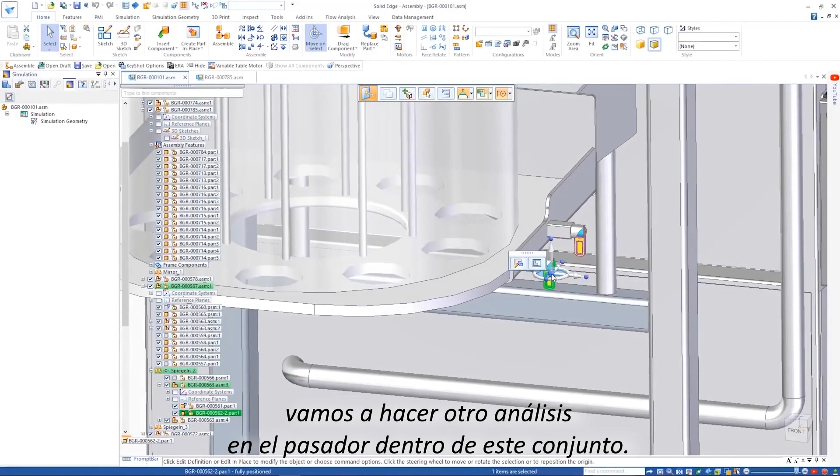Now back to the assembly, we're going to do another analysis on the pin within this assembly. You notice this pin is a mesh model. Simulation can now perform analysis on mesh models. You simply apply the boundary conditions, the loads and constraints where needed, and run the analysis. Here you see the result for the pin on this mesh model. And with that, Dan, I'll turn it back over to you. Okay, thanks so much, Jeff.

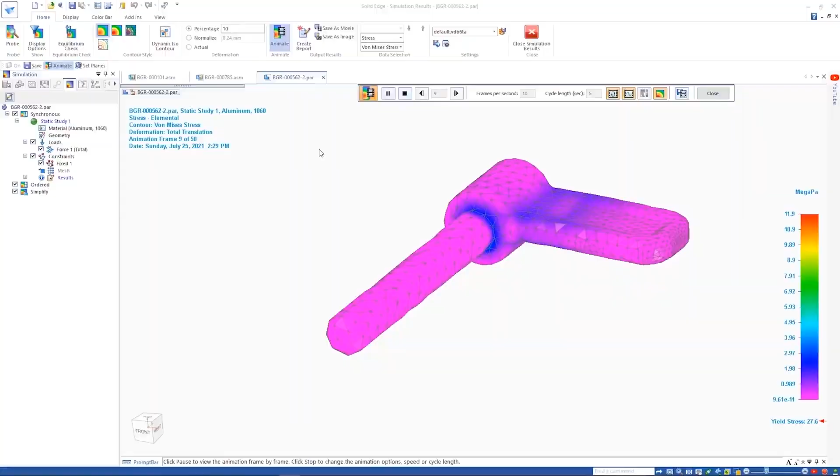Lots of great new things in there. Obviously, the hydrostatic pressure load takes a lot of work out of the process for you. The way the beam elements are automatically connected together, great stuff. But also that body mesher. You can take a mesh that's very irregular, very difficult, and remesh it with the body mesher. It's a game changer for analysis.

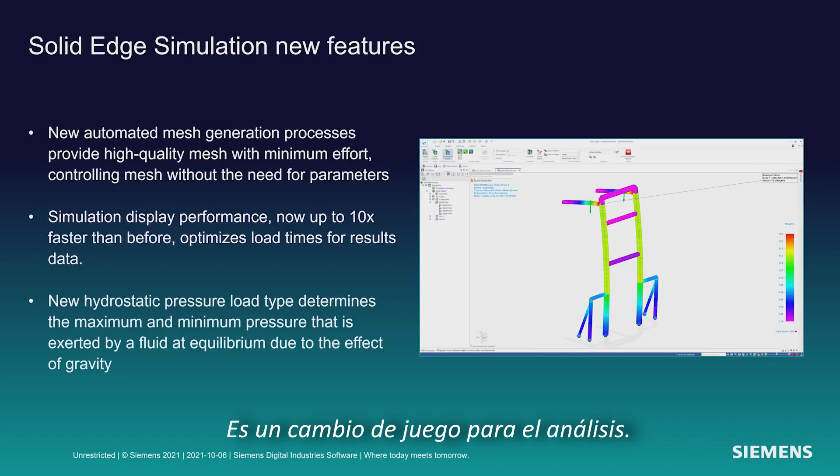Next up is Simcenter Flowmaster for Solid Edge. If you're doing any types of products where you have piping and you need to do analysis on the piping or design on the piping and the flow within the pipes, Simcenter Flowmaster for Solid Edge is for you. Let's take a look at how it works with Jeff.

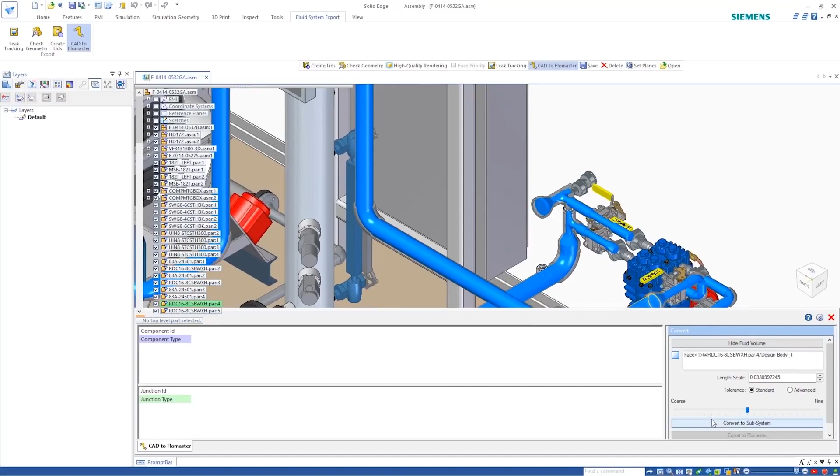Thanks, Dan. The unique CAD to Flowmaster technology extracts the geometry from Solid Edge assembly and automatically creates the corresponding fluid volume that exists inside the pipe runs and components. During the process, a face can be selected to give the length scale and convert the system to a subsystem. The abstraction process is fully automated. There is also full control over the fidelity of the model, which can be adjusted with the slide bar.

Individual elements can be inspected, deleted, and merged. Once the network configuration is defined, the geometry can be exported to Flowmaster. Following export, the file will be saved for reuse, then automatically opened in Simcenter Flowmaster for Solid Edge in the Subsystem Import Wizard. The CAD geometry, centerline, and component connections can be seen in the wizard, and the model can be rotated to the desired projection when the network is created.

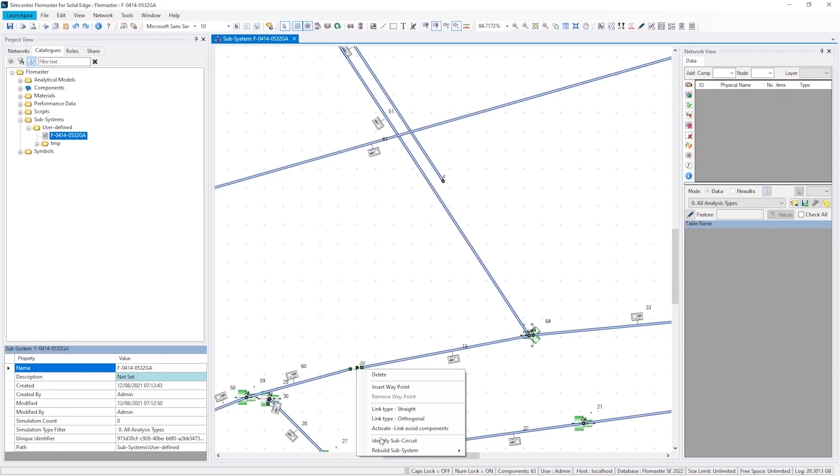On selecting import, a new subsystem will be created for review. The entire subsystem can be used to create a model, or individual pipelines can be extracted into their own subsystem. For a flow analysis of this model, we are going to extract the pipe from the two compressors to the center vessel. We create a second subsystem from the first and save it in the subsystem catalog.

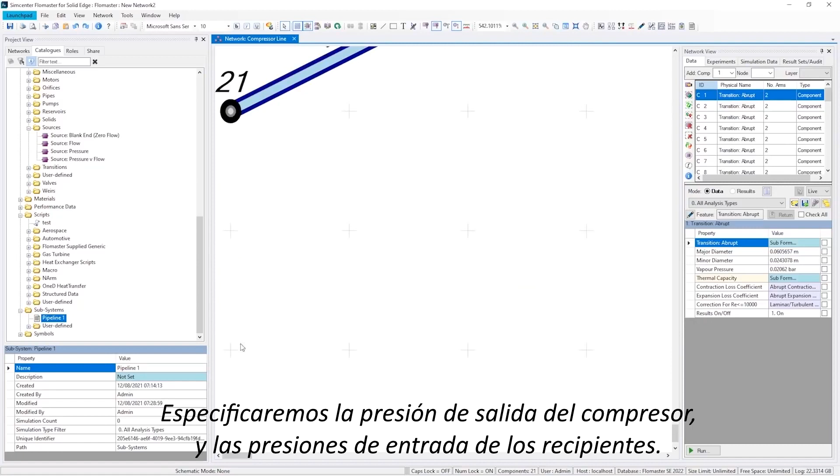We'll now add the subsystem to a new network and specify the boundary conditions using pressure sources. We'll specify the compressor outlet pressure and vessel inlet pressures. For this low-pressure system, we'll specify air as the working fluid and run a static simulation. Following the simulation, we can look at the results for individual components or look at the whole system using network visualization. With this, we can quickly oversee flows, pressures, and velocities.

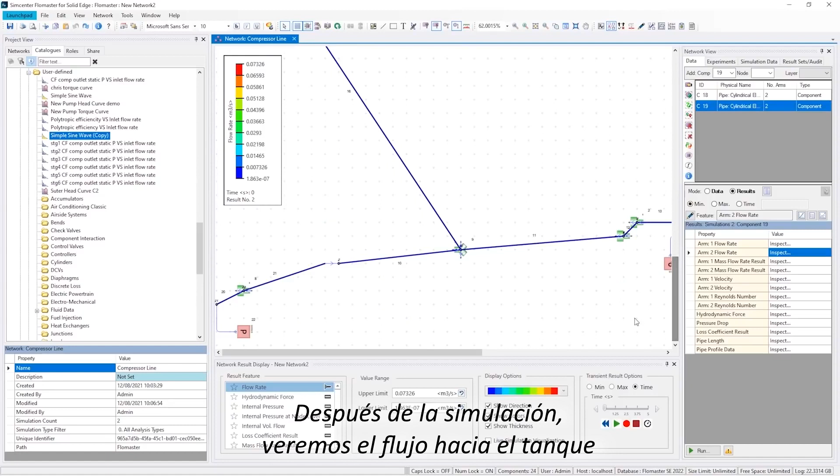Next, we'll look at the effect of a pressure pulse from the compressor on the system. We'll specify curves defining the pressure pulse and the source, and then run the transient simulation. Following the simulation, we'll look at the flow into the tank, where we can see the effects of the pressure pulse from the compressor. Then, moving to the compressor outlet, we can enable transient visualization to see the variation in flows, and that the larger flow is from the left-hand compressor. And back to you, Dan.

Thanks, Jeff. Some super advanced technology there that we're happy to bring to the Solid Edge community. This is one of the advantages of the Xcelerator portfolio, the ability to bring advanced technology to you. Great capabilities here in terms of easily modeling and analyzing the fluid system. The great extraction of the center lines automatically from the 3D geometry, so you can go straight into that analysis and see what's going on with your system.

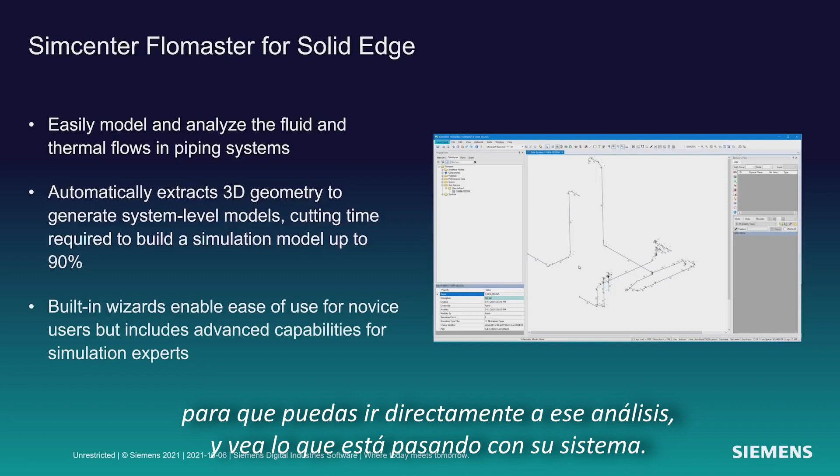So that was a feature-packed release, right? We went through a lot of stuff, many things in Solid Edge 2022 that are going to help your business. I have to say, there's simply so many amazing things in there. The number of improvements are enormous. And I think that's been echoed by all of our beta customers. Everyone is saying, this is the best release of Solid Edge ever.